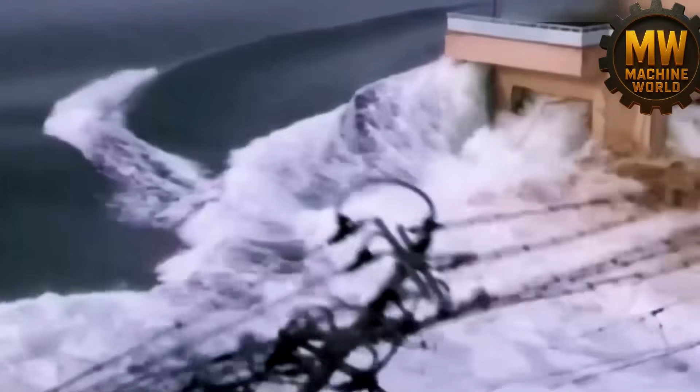It would seem an impossible task to fortify an entire coastline against the Pacific, but without this $12 billion investment, the next seismic event would find the population utterly defenseless against the absolute fury of the sea. One can notice how a concrete scar now stretches across 400 kilometers of the coast. This is not merely a wall, but a monumental engineering feat designed to prevent a repeat of past tragedies. It gets more complex further on.

The country does not simply float on the water, but sits directly atop a geological time bomb. To understand the scale of this struggle against the ocean, one must look down into the dark depths where sunlight never penetrates. Japan is positioned exactly at the convergence point where four gigantic tectonic plates collide. Imagine four stone continents continuously pushing, scraping, and fighting for space with relentless pressure. This is the Ring of Fire, a zone that produces more than 500 earthquakes every single year. The Earth there never sleeps.

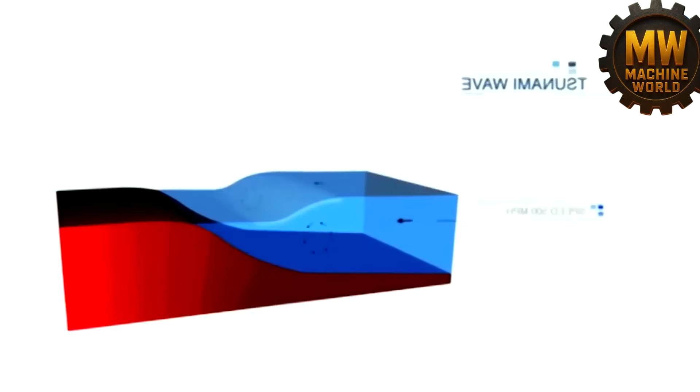When the accumulated subterranean tension finally ruptures, the seafloor is thrust upward with unimaginable physical violence. This displacement does not create a standard wave, but a moving mountain of water with immense kinetic energy. During the events of 2011, the old defenses of Japan, consisting of walls 7 or 8 meters high, were treated like children's toys by the surge. The water transitioned over them as if they did not exist, exerting pressure that crushed old concrete and twisted structural steel. It is visible how the sheer force of the tide rendered previous engineering philosophies obsolete.

At first glance, the destruction was absolute, but in reality, it forced a fundamental shift in defensive strategy. Engineers realized a terrifying truth. It was not enough to simply build higher. They needed to reinvent the physical structure of the coastline itself. The primary mission evolved from merely stopping the water to a strategy of buying time. This precious window of minutes provides the opportunity for people to reach higher ground and survive the initial impact. Consequently, the construction of this 21st century Great Wall began under a new set of parameters. The process is only gaining momentum.

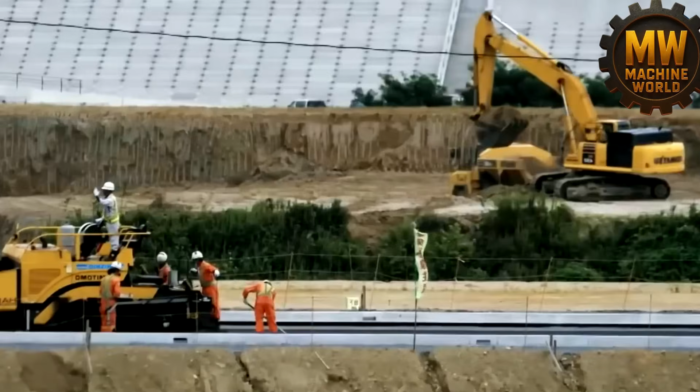One can notice the precision with which the new barriers are integrated into the topography. The camera glides along the massive embankments where reinforced materials are layered to withstand seismic vibrations. Everything only gets more complicated as the design must account for the specific fluid dynamics of a tsunami. The engineering focus shifted toward structural resilience and the dissipation of energy. Every meter of the 400-kilometer barrier represents a calculated defense against the movement of the tectonic plates. This massive shield stands as the current culmination of Japan's efforts to stabilize its future against the unpredictable shifts of the Earth's crust. Thus, the transformation of the coastline reaches a state of readiness for the challenges that lie ahead.

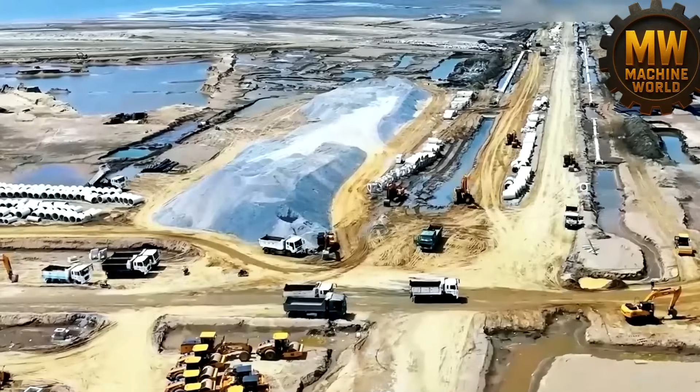One laboratory. This is where the survival of an entire coastline begins before a single grain of sand is even moved on the beach. Why must scientists recreate the apocalypse in giant water tanks before pouring the first drop of cement? It would seem that simple observation of historical events would suffice for design. However, by repeatedly hurling tons of water against scaled wall models, researchers discovered that sheer height was not the ultimate defense. At first glance, a tall barrier appears impenetrable, but in reality, the immense force of a tsunami would snap a purely vertical structure at its base like a dry branch. One can notice how the water pressure concentrates at the foundation, seeking the weakest point of resistance.

The solution lay in the geometric shape of the structure and, more importantly, in what remained hidden beneath the surface of the Earth. The regional coastline of Tohoku in Japan presents a geological nightmare consisting primarily of soft, unstable, and treacherous sand. Building a concrete rampart 15 meters high on top of such a substrate is equivalent to balancing a heavy truck on a wet sponge. The process is only gaining momentum as engineers address this fundamental instability. If a tsunami were to strike a wall built on untreated sand, the ground would liquefy and the entire structure would collapse forward. The engineering response was both brutal and invisible to the naked eye.

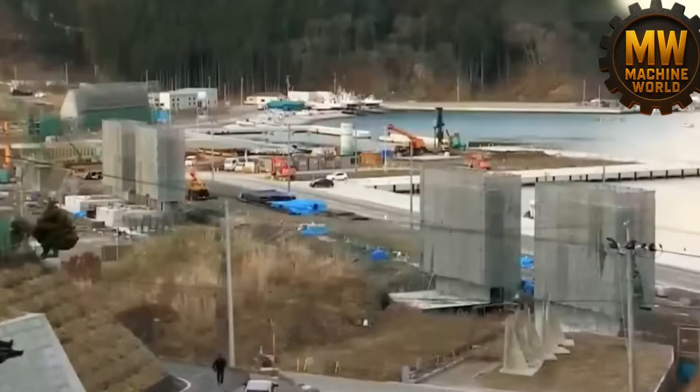The true strength of this defensive line is not found in the visible concrete, but in the massive reinforcements buried deep within the coastal shelf. Drilling machines resembling equipment from a science fiction narrative began the transformation of the landscape. They did not merely excavate soil, they fundamentally altered its physical properties through mechanical and chemical intervention.

Steel and concrete piles were driven 25 meters into the earth, a distance equal to the height of an 8-story building. Everything only gets more complicated as the stabilization continues. One can notice how the equipment injects liquid cement directly into the sand layers, fusing the loose particles into a solid mass of artificial rock. This creates an unbreakable root system designed to anchor the barrier against the most violent hydraulic forces.

It gets more complex further on. The objective was to ensure that even if a wave overtopped the crest, the foundation would not tilt or give way. The wall would remain standing like a stone sentinel, refusing to cede ground to the ocean.

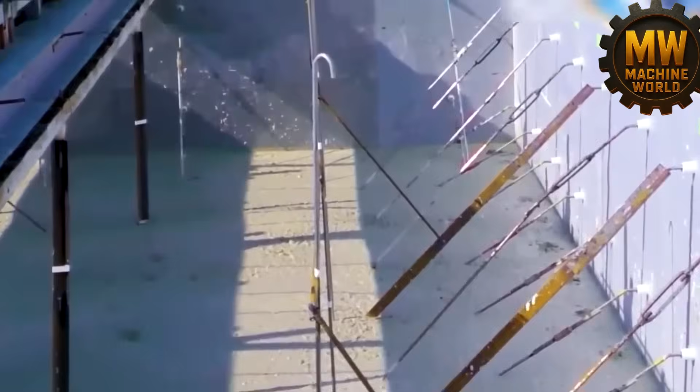With the foundation finally prepared for this industrial war, the construction army arrived on the scene. 30,000 people, including engineers, laborers, and crane operators, formed a massive workforce dedicated to the project. It only looks obvious to call this a team, but in reality, it was a specialized military-scale operation. A fleet of heavy machinery consumed diesel and operated 24 hours a day for 7 consecutive years.

The logistical challenge was nearly impossible to comprehend. It involved the construction of a continuous, flawless barrier spanning 400 kilometers. This distance is equal to the journey between London and Paris, but realized entirely in military-grade reinforced concrete. Transition to the next level.

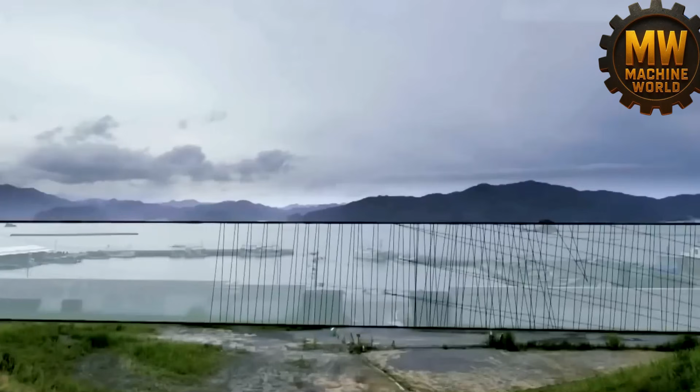One can notice the hypnotic and terrifying scale of the work as the metal skeleton takes shape. First, thousands of tons of steel rebar with metal bars as thick as a human arm were woven into complex industrial cages. This serves as the internal skeleton of the structure, providing the necessary tensile strength. Without this dense webbing, the rigid concrete would shatter instantly under the tension of a massive wave.

Then came the liquid heart of the rampart, the industrial concrete. High-pressure pumps operated with a steady rhythm, pushing a gray avalanche of material into the waiting molds. Section by section, the massive blocks began to rise from the reinforced ground. The material leaves the molds, transitioning into a calm stage as the concrete cures into its final form. Thousands of tons of reinforced concrete and high-grade steel form the primary line of defense, rising block by block against the horizon.

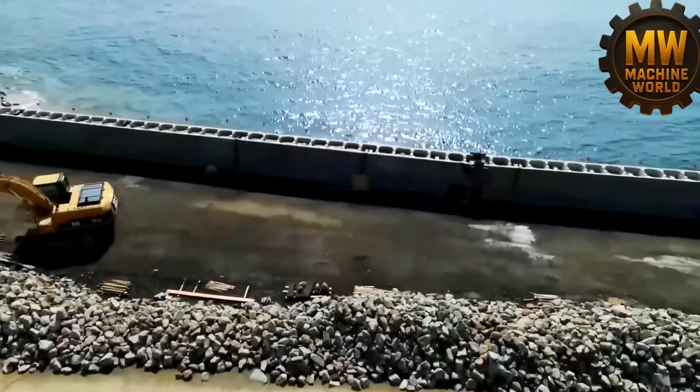Why is a vertical wall insufficient to stop the ocean? A flat surface would eventually fail because water strikes it with the kinetic energy of a high-speed bullet train. To dissipate this immense impact, engineers deploy a geometric secret weapon known as tetrapods. One can notice these 4-legged structures resembling giant concrete toys scattered along the shoreline. But in reality, each individual unit weighs several tons, and they are stacked by the thousands directly in front of the seawall. Their primary function is the creation of controlled chaos.

When a massive wave makes contact, the water does not strike the solid wall like a single crushing hammer. Instead, the liquid is forced to break apart, swirling and foaming as it loses momentum between the thick concrete legs of the tetrapods. They successfully transform a lethal strike into a manageable push through pure physical resistance. The process is only gaining momentum. It is the application of physics to tame the raw force of nature, yet a significant logistical challenge remained for the designers.

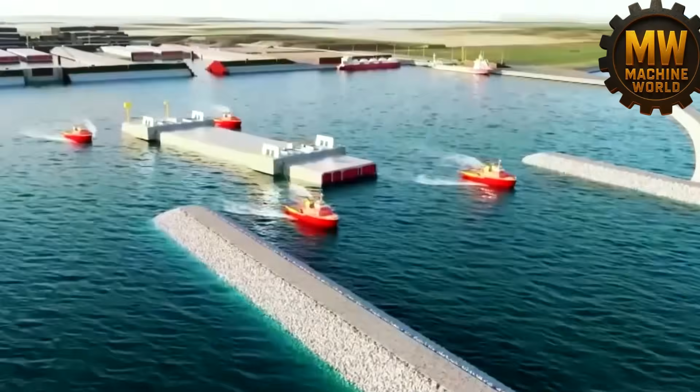Japan depends entirely on the sea for its survival. Fishing vessels, massive cargo ships, and tourism boats require constant passage into and out of the harbors. If the entire coastline were sealed behind a continuous wall, the national economy would effectively vanish. In such a scenario, coastal cities would suffer from economic starvation. How do you allow ships to pass while simultaneously stopping a tsunami?

The Japanese engineering solution was the development of massive steel guillotines. In high-traffic ports, they installed gates that look like something from a cyberpunk future. One can observe how the equipment gradually integrates into the landscape. Yet these structures are terrifying in their efficiency. There are 2 primary categories of these gates. The first is the vertical drop gate.

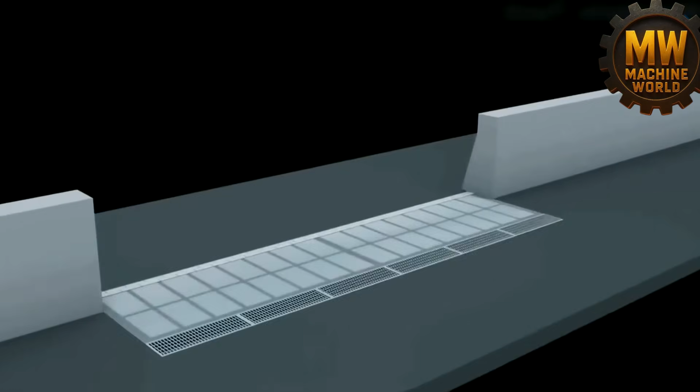A massive steel plate weighing several hundred tons remains suspended between 2 towering concrete supports. It stays in its elevated position as ships navigate safely beneath it every day. But this is not the limit of the system. The moment seismic sensors detect an earthquake on the ocean floor, the mechanism changes. Hydraulic motors release the heavy locks, and the massive plate descends rapidly. The port is sealed within seconds as a wall of steel blocks the entrance.

The second type of barrier is even more technically impressive, consisting of gates that rise directly from the seabed. These structures lay flat on the ocean floor, remaining invisible and allowing ships to navigate over them without obstruction. When the alarm sounds, air pressure or hydraulic systems force the gates upward. An instant barrier emerges from the depths.

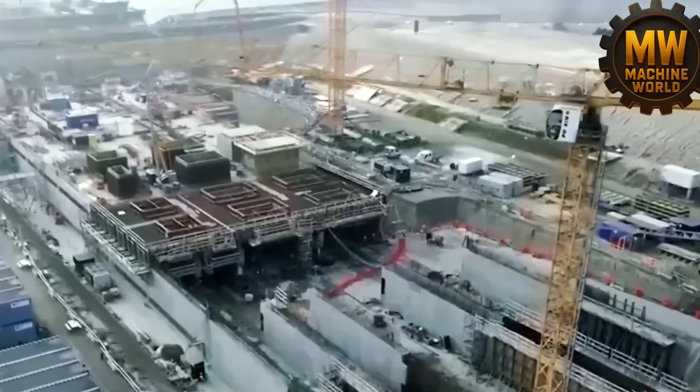A significant challenge here is the constant threat of corrosion. Salt water destroys metal surfaces rapidly through oxidation. These gates must be capable of functioning perfectly even after sitting idle in salt water and abrasive sand for 30 years.

A single failure or a rusted hinge could lead to the flooding of an entire city. Therefore, the maintenance of these mechanical beasts is treated as a matter of absolute national security. Japan did not stop its engineering efforts at the surface level.

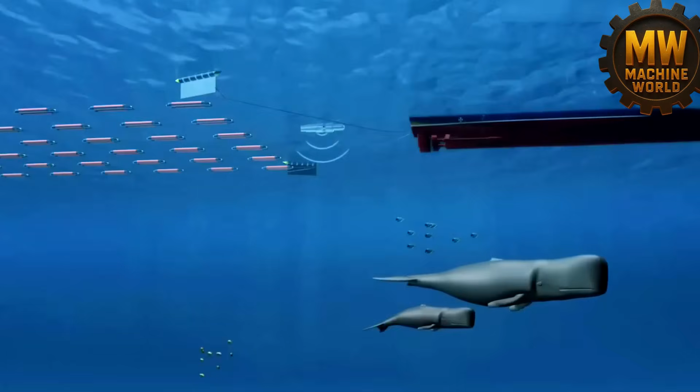200 meters is the length of each individual concrete segment used by Japanese engineers to construct underwater passages through a method that initially seems to defy physical logic. Why would a construction team build a massive tunnel on dry land only to intentionally sink it into the depths of the ocean? It only looks obvious to build directly on the seabed, but in reality, constructing these elements in controlled dry docks ensures the structural integrity required to withstand immense hydrostatic pressure. This specific technique is known as the immersed tube method, and it relies on the fabrication of monolithic components before they ever touch the water.

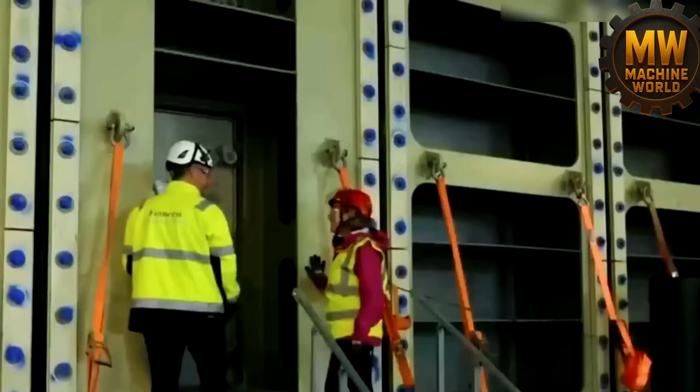The scale of these structures is immense. 73,000 tons is the weight of a single segment, a figure that surpasses the mass of a fully loaded aircraft carrier. Engineers must oversee the casting of dozens of these concrete giants within the confines of specialized dry docks. But this is just the beginning.

One can notice the slow movement of valves as the docks are eventually flooded, allowing the displacement of water to lift the structures. Powerful tugboats strain against the tide as they drag the floating concrete monsters into the open sea. It is visible how the vessels fight against unpredictable currents and wind shifts to maintain a precise trajectory. The equipment gradually maneuvers these segments toward their final coordinates in what functions as a slow and high-stakes industrial ballet. The process is only gaining momentum.

Precision becomes the absolute priority once the sinking operation commences. At first glance, submerging a 73,000-ton block seems like a matter of brute force. But in reality, the segment must be guided into the total darkness of the seabed to align with the previous section. A deviation of only a few millimeters would compromise the entire structure. Everything only gets more complicated as the segment nears the ocean floor. If the connection is not perfectly flush, the seals will fail under the weight of the water, leading to a catastrophic breach. The pressure at these depths would easily crush the concrete blocks if the alignment were even slightly off.

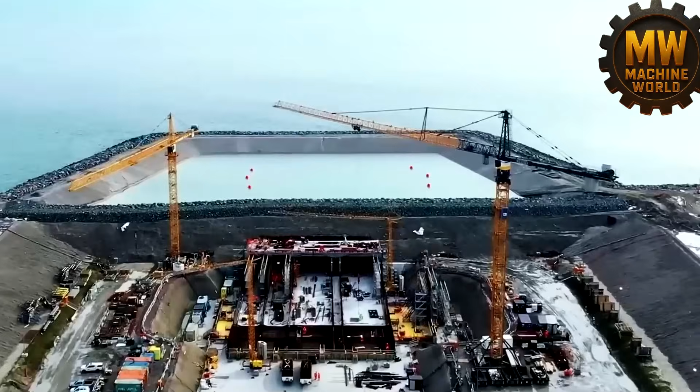Thus, the massive segment eventually settles into its designated cradle, completing its transition from a dry dock to a functional underwater artery. Ballast tanks are gradually flooded with water to force the massive tunnel sections to descend slowly toward the seabed. Why is the immersion speed controlled with such agonizing precision? At first glance, the sinking looks like a simple mechanical drop. But without a gradual increase in weight through water intake, the buoyancy of the hollow concrete structure would cause it to tilt or fracture during the transition through the currents.

Sonars and high-frequency lasers guide the descent through the murky depths. One can notice how the equipment gradually adjusts the orientation of the segment as it nears the foundation. The process is only gaining momentum.

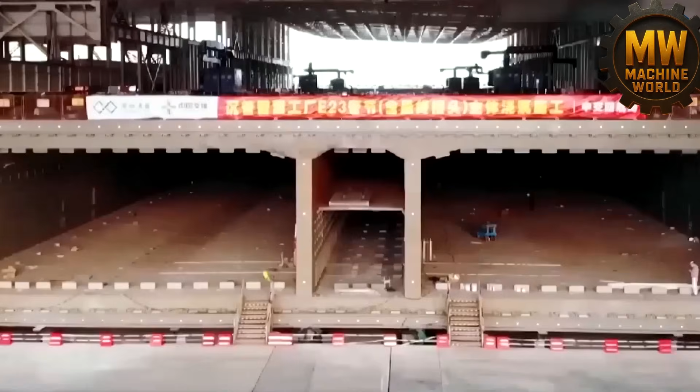A giant rubber gasket seals the interface at the exact moment the two massive pieces make physical contact on the floor of the ocean. It is visible how the immense pressure of the surrounding water pushes the segments against one another with a force of thousands of tons. This physical phenomenon makes the seal increasingly tighter as the depth increases. The force of the sea itself is utilized to ensure the interior remains perfectly dry. It gets more complex further on.

Engineers cover the entire structure with layers of heavy stone and protective sand to bury the tunnel permanently beneath the seabed. This armor shields the concrete from anchors and shifting currents. Motorists will eventually travel through this corridor at speeds of 100 kilometers per hour. They will move forward without knowing that millions of tons of ocean water are pressing down just a few meters above their heads. The structure literally gains life after the concrete dries and the heavy machinery departs from the site.

These walls and submerged tunnels are far from being dead stone. They possess a complex nervous system. One can notice how hundreds of electronic sensors are embedded deep within the concrete layers during the initial casting. Everything only gets more complicated.

Sensors monitor the external water pressure, the vibrations generated by heavy trucks, the air temperature, and even the smallest displacement of the surrounding soil. This data flows in real time toward control rooms that resemble command centers used by space agencies. The equipment ceaselessly records every fluctuation in the environment.

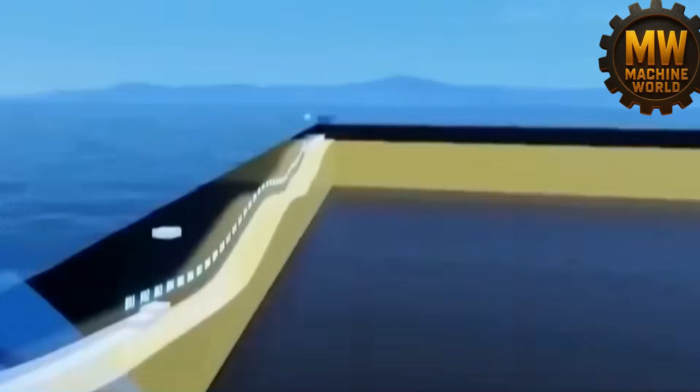If a microscopic crack appears in the reinforcement, the engineers receive an immediate notification. If the seabed shifts by as little as 1 millimeter, the alarm sounds throughout the monitoring station. High stakes demand this level of constant vigilance. The molten stream of data ensures the safety of the entire underwater passage. This ensures the integrity of the work as the construction phase reaches its conclusion.

$12 billion is the staggering financial weight invested in a project where the margin for error is non-existent. Why invest such a colossal sum into a barrier that cannot fully halt a massive tsunami? It seems counterintuitive to build a wall that the ocean might still crest over. But the strategic objective lies not in total dryness, but in the physics of energy dissipation, as the structure is engineered to fracture the lethal momentum of an incoming surge.

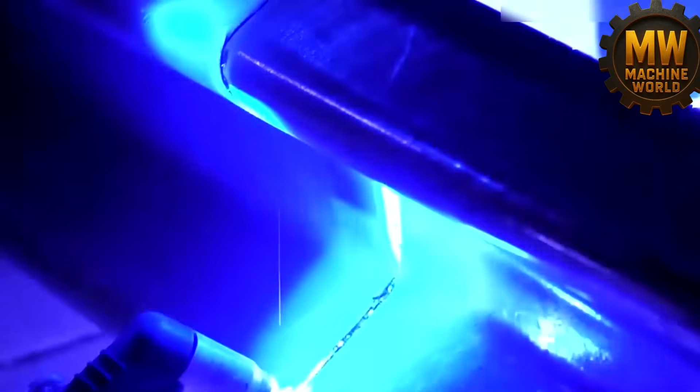The process of maintaining this defense is a continuous confrontation with the natural elements. Automated underwater robots equipped with high-resolution sensors glide along the submerged foundations to detect structural fatigue. Maintenance teams work systematically to clear drainage channels, ensuring the hydraulic integrity of the system remains absolute for the moment of impact. One can notice how the metallic arms of the ROVs maneuver through the dark currents to inspect every inch of the base. But this is just the beginning.

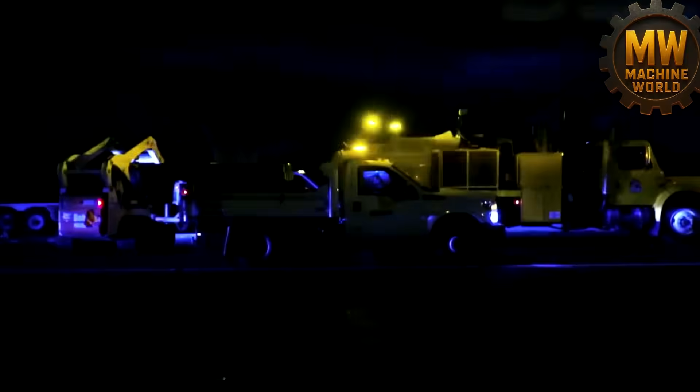Simulations conducted by engineers reveal a critical technical reality regarding the wall's performance. The barrier reduces the physical impact of a wave by 30 to 50%. Instead of a supersonic wall of water obliterating everything in its path instantly, the resulting flood becomes a slower, more predictable inundation. This serves a singular, vital purpose: the acquisition of time.

5 minutes or 10 minutes represent the narrow window required for a successful evacuation. It is the duration needed for the elderly to reach higher ground or for school staff to move children to safety zones. This concrete scar, stretching across 400 kilometers of the Pacific coastline, does not represent human arrogance against the sea. The movement of tectonic plates and the inevitable rise of the ocean are recognized as unstoppable physical constants.

At first glance, it is merely a gray line of stone, but in reality, it is a technical shield designed for human persistence. It functions as a testament in steel and stone, stating that while the coast may be struck, it will not be defenseless. The wall is not a promise of immortality, but a calculated bet on the survival of the population.

Everything only gets more complicated when the sirens eventually sound. This cold mass of reinforced concrete will stand as the solitary physical buffer between the kinetic energy of the ocean and the inhabitants of the shore. This is the point where complex civil engineering intersects with the primal instinct of survival.

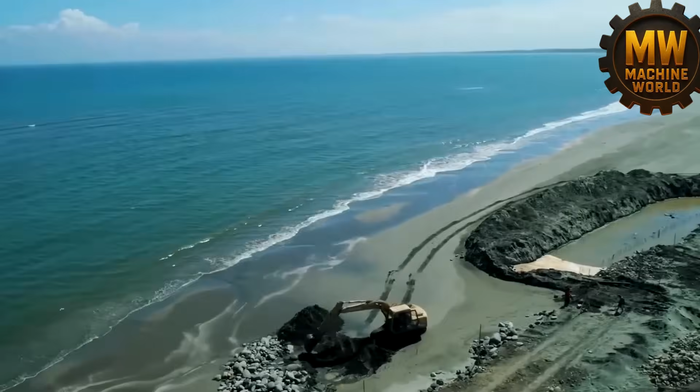19,000 tons of earth and rock must be processed to extract a mere 260 grams of gold. This is roughly equivalent to the weight of a single standard smartphone. How is such a minute quantity of precious metal separated from an almost incomprehensible volume of ore? The process is only gaining momentum. It is a technical narrative of a luster that originates in the subterranean dark, marking a journey from ancient geological formations to the finality of a gold bar.

Thousands of tons of rock split apart under the force of industrial crushers to reveal the microscopic particles within. One can notice the dust settling in heavy clouds as the primary grinding stations begin their work. The story of this metal is one of extreme ratios and mechanical precision. From here, the transformation moves to the next phase of processing.

4,000 tons of gold are extracted annually across the entire globe, marking the sheer scale of the industry behind this precious metal. Why is this specific element pursued with such intensity compared to other materials found in the crust? One might assume its value is merely a social construct, but the answer lies in its physical invulnerability, as gold does not rust, fade, or corrode under any natural conditions. It remains one of the few substances on Earth that never requires a secondary proof of its worth, standing as a permanent anchor of confidence.

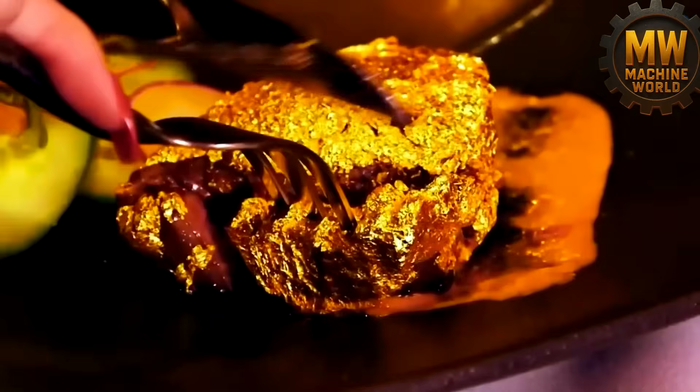The process is only gaining momentum as modern exploration techniques replace the primitive pans of the past. Tens of thousands of seekers pushed westward, driven by the prospect of power they could physically hold in their hands. The metal manifests throughout the modern luxury sector, appearing on high-performance supercars and even as edible flakes atop steaks that cost several thousand dollars per serving.

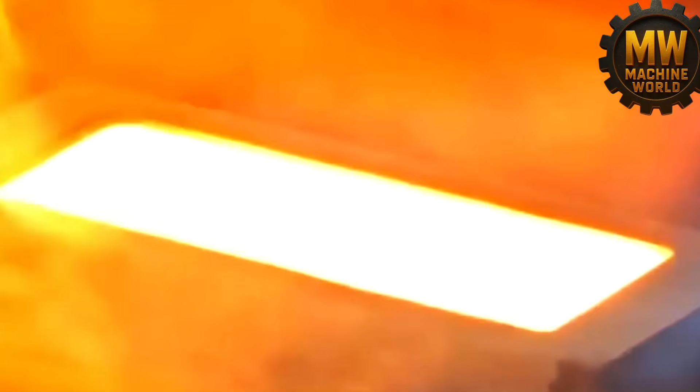One can notice how the material transitions from a raw geological find into a manufactured marker of status. It seems simple to categorize gold as mere jewelry, but in reality, it has served as sacred objects and elite household utensils since the Neolithic era, dating back more than 6,000 years.

Rumors once circulated regarding a brilliant gold card associated with the name of Donald Trump, with some claims suggesting a value of $5 million. It was even whispered that possession of such an object could influence the granting of American citizenship. Whether these items are functional tools or purely symbolic, they represent ambition that a person can wear.

It does not end at this stage, as the gold must first be liberated from impenetrable subterranean vaults. Equipment gradually penetrates the deeper layers of the earth, where the metal remains hidden from the surface. It is visible how the search for deposits requires extreme patience, as the ore does not reveal itself without significant mechanical effort. The camera glides along the transition from historical surface mining to the complex industrial operations of the present day. Everything only gets more complicated as the hunt for the metal leads into two entirely different environmental worlds.

Boulders split with a crack during the extraction phase, moving the material from the darkness of the depths toward the processing facilities. Before the gold can be locked away in high-security vaults or displayed in high-end showrooms, it must be isolated from the surrounding rock. Transition to the next level involves shifting the focus to the specific geographical zones where mining reaches its peak. From here, the journey moves toward the technical challenges of the terrain.

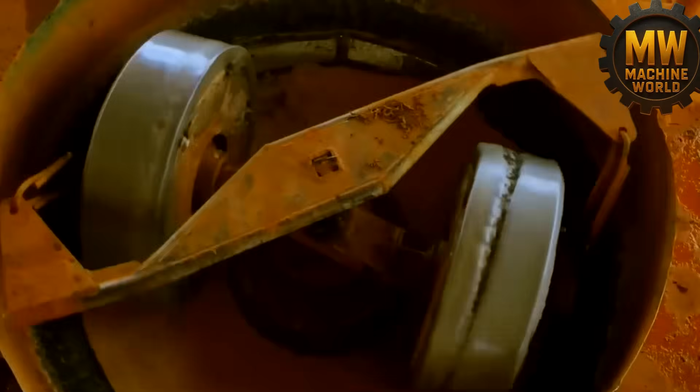$1 a day is the entire budget for survival in a region frequently described as living atop vast gold reserves. Why do families choose a life of such extreme hardship under a scorching sun? The answer lies in the red dust that coats everything, where gold does not glitter in shop windows, but remains hidden beneath a landscape of interrupted childhoods. Families, including children far too young to spell their own names, grasp rusted shovels and follow their parents into dry, relentless soil with the singular hope of unearthing a few precious flakes. This gold mining is not a profession, but a desperate lifeline.

It gets more complex further on. One can notice how the health of these children is the true currency spent as they grow up inhaling mineral dust instead of pursuing dreams. Their classrooms are the muddy banks of rivers, and their toys are industrial tools. For them, the metal is never a symbol of status or wealth. It is the only physical chance to survive for another 24 hours.

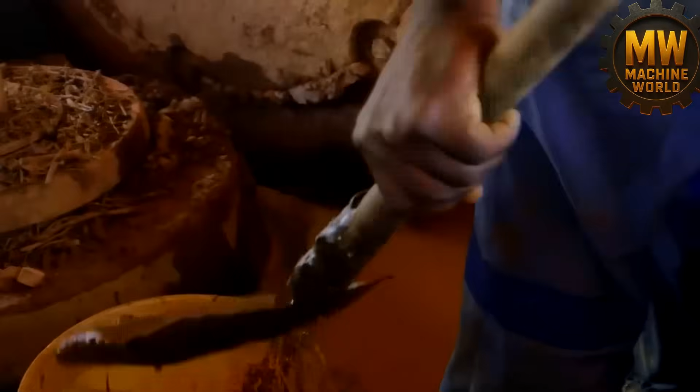One portable metal detector and a pair of trained ears are the only tools used to begin a standard day of hunting. It seems simple at first glance, but in reality, the process relies on acute sensory focus and geological knowledge. Miners walk with slow, deliberate steps, their eyes fixed on the parched earth while listening for the faint electronic pulses of the device. Every beep provides a brief window of hope, but the labor is never left to chance. Experienced miners identify specific geological indicators, searching for gold deposits around quartz, slate, or ancient alluvial paths where the metal once traveled. The process is only gaining momentum.

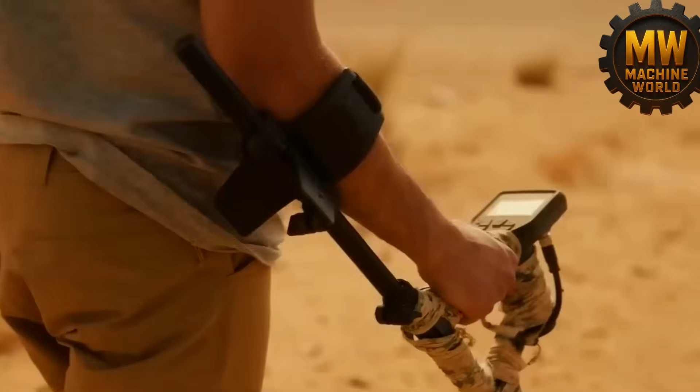Once a signal is confirmed, the team initiates the excavation and the physical toll begins. Tens of meters are excavated into the earth using nothing more than shovels, pickaxes, and raw human strength. The camera glides along the vertical drops where shafts grow deeper without the assistance of any modern machinery. In certain sectors, miners utilize rough tree trunks to provide structural support for the tunnels. Yet the mechanical risk of a total collapse remains a constant physical reality. As the depth increases, the workers must crawl through narrow horizontal passages that are barely wide enough to accommodate a person lying on their side.

Every hole serves as a high-stakes gamble. A tunnel might result in an empty vein, or it may reveal ore bearing enough value to equal a full month of wages. Everything only gets more complicated as the raw material reaches the surface. Heavy sacks filled with earth are secured with manual ropes and hoisted upward by basic pulley systems. These bags are piled in staging areas to await mechanical crushing. Once the rock is pulverized, the material is moved to a separate zone for a delicate and hazardous chemical intervention. Transition to the next level. This stage involves the introduction of mercury into the sediment.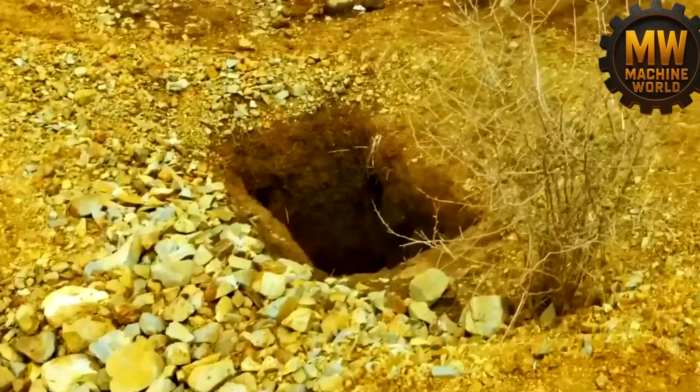Although mercury is a documented neurotoxin, it remains the only accessible chemical in this environment capable of dissolving gold to separate it from surrounding impurities. The equipment gradually processes the mixture, allowing the mercury to bind with the microscopic gold particles. The heavy metal mixture sits in shallow pans as the separation begins. This phase concludes the extraction, leaving the concentrated amalgam ready for the final heat treatment.

20 to 30 minutes is the exact duration workers spend kneading the mixture with mercury to initiate a chemical bond. Why is such a manual process still utilized in these regions? Manual pressure forces the two elements to fuse into a gray, putty-like amalgam. But this is just the beginning. The mercury remains trapped within the metallic mass until intense heat is applied to the substance.

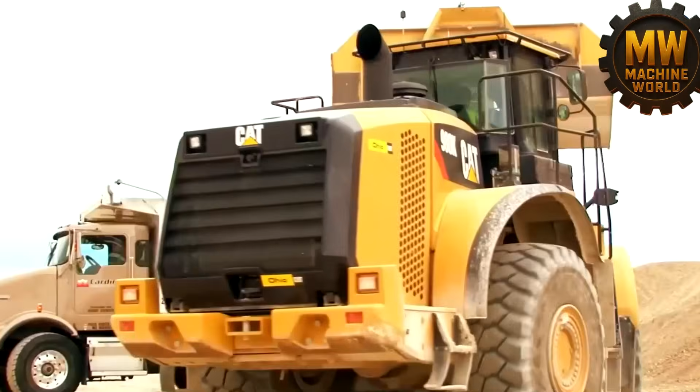One can notice how the flame causes the mercury to evaporate, vanishing into the atmosphere and leaving behind only a residue of raw gold. It only looks obvious that this is the most direct path to the metal, but in reality, the simplicity of this primitive method remains devastating to the environment. This lethal and archaic approach stands as the total opposite of how gold is extracted on the other side of the planet.

In total contrast to the manual mining operations found in Africa, industrial sites in the United States have adopted modern machinery and advanced technology to extract gold on a massive scale. Such an approach not only increases overall efficiency, but also actively helps to reduce the environmental footprint of the operation. The process is only gaining momentum as it shifts to the gold mines of Nevada. Here, the journey toward the precious metal takes a fundamentally different path driven by technical innovation.

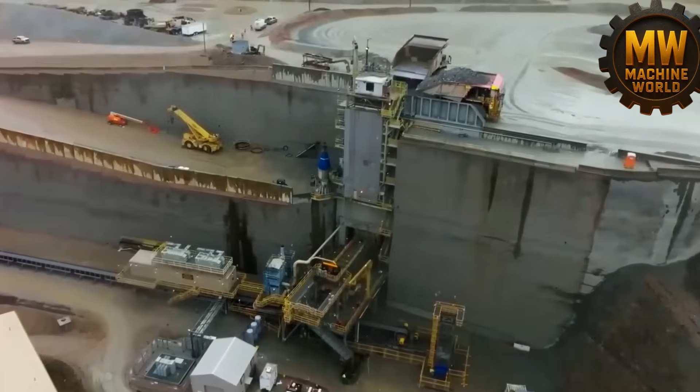10 to 20 meters is the standard depth for the deep boreholes drilled into the earth during the first step of modern gold mining. An imposing drilling rig, mounted securely on a heavy-duty service truck and covered in a complex network of hydraulic lines, drives steel pipes into the solid rock with incredible precision and mechanical force. The equipment gradually penetrates the crust to prepare for the introduction of blasting agents.

Why do engineers drill dozens of holes with such inch-perfect precision? At first glance, the placement might seem random, but it ensures the energy is distributed evenly. These voids are subsequently filled with explosives, which are carefully prepared to shatter thick layers of solid rock. Technicians place individual detonators into every single hole. One can notice how a single site may contain anywhere from 50 to 100 of these charges. Each one is meticulously connected and timed with millisecond precision to ensure a controlled sequence.

Everything only gets more complicated as the final countdown begins. When the designated moment arrives, the explosives are triggered simultaneously. Powerful detonations shake the entire area with a low-frequency roar. It is visible how the rock face fractures instantly, sending dense clouds of dust and debris into the air as the solid ground is transformed into manageable ore. This concludes the primary fragmentation phase, opening the road to the next stage of material transport.

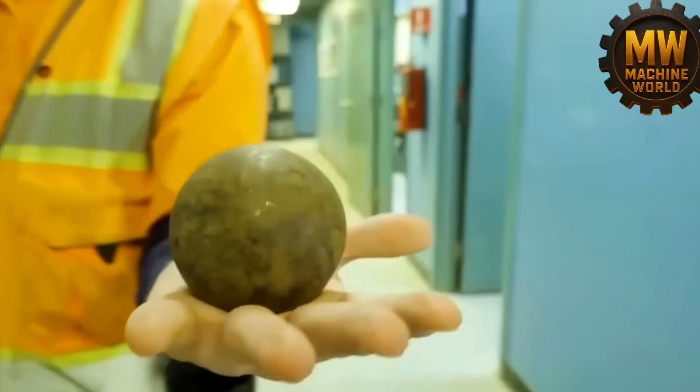Tens of thousands of tons of rock are shattered in a single moment as explosions release thick plumes of smoke into the atmosphere. The released energy is so extreme that it tears away entire sections of the mountain, disintegrating massive stone formations into thousands of smaller fragments. This catastrophic force is precisely calculated to simplify the subsequent collection and separation of the precious metal. Why is such a violent disruption of the landscape necessary? It only looks obvious that machines could dig the earth, but in reality, the rock is too dense for even the strongest equipment. Without these controlled detonations, the gold-bearing ore would remain locked within the impenetrable mountain walls.

Heavy-duty excavators move into the blast zone as the dust slowly settles. With each mechanical cycle, the buckets scoop up several tons of ore and deposit them onto a sophisticated system of conveyor belts that stretch along the perimeter of the mining site. The equipment gradually moves the material toward temporary storage with mechanical consistency. But this is just the beginning.

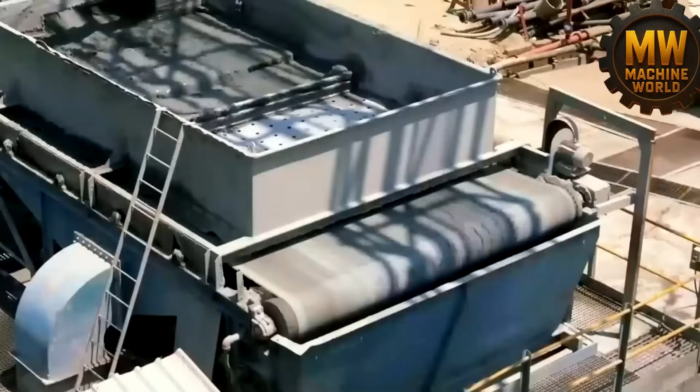A massive ball mill receives the ore for the primary grinding stage. The giant machine is filled with tens of thousands of steel spheres, with individual weights ranging from a few kilograms to over 27 kilograms each.

In total, several hundred tons of solid steel fill the rotating drum. One can notice the slow, rhythmic rotation of the mill as the internal load shifts. The steel spheres fall and collide with the ore with tremendous force as the mill turns on its axis.

Little by little, the hard rocks are pulverized under the weight of the steel until they are transformed into a fine, uniform powder. This grinding cycle continues without interruption for 20 to 30 minutes, reducing the ore until it reaches the consistency of dust. Everything only gets more complicated as the extraction of the gold reaches its next critical chemical phase.

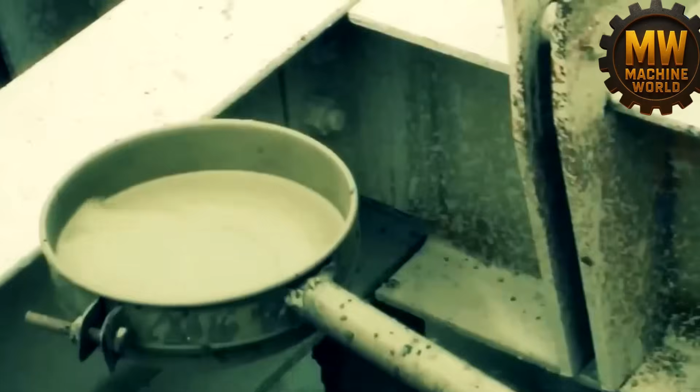1120 degrees Celsius is the precise temperature required to bring the extraction process to its thermal conclusion. Why is the transition to a liquid state so critical at this final stage? The primary crushing of the raw material into a fine powder has already made the gold much easier and more efficient to handle during the initial phases. But the heat serves a different purpose, ensuring the metal reaches a state of total homogeneity before it is cast into its final form.

Water is added to the crushed ore, transforming the dry mineral into a thick slurry that flows like heavy sludge. It is visible how this consistency allows the equipment to separate the gold from undesirable waste materials with greater fluidity. The extraction begins with a method that only looks obvious: physical separation in large open-air tanks. But this is just the beginning.

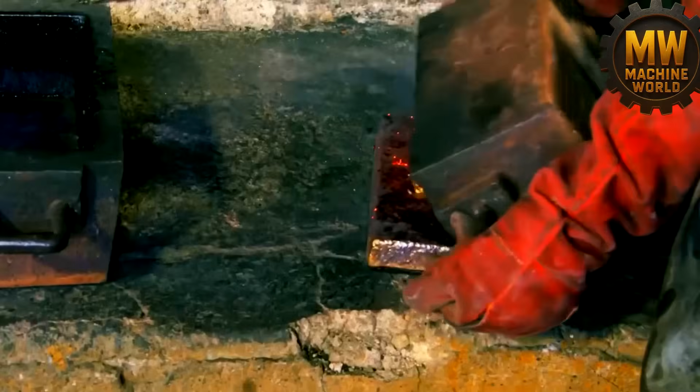Chemical agents, such as cyanide, are introduced into the mixture to dissolve any remaining gold particles still trapped within the ore. This solution is then pumped into an electrolytic cell, where a constant flow of direct current passes through the gold-bearing liquid. One can notice how the gold ions migrate steadily toward the negative electrode, gradually depositing themselves as a solid layer of pure metal that adheres firmly to the surface.

Everything only gets more complicated as technicians monitor the environment. Every parameter is maintained under carefully controlled conditions to guarantee the resulting metal reaches a purity level of nearly 100%. The process is only gaining momentum. Once the electrolysis is complete and the pure gold has been isolated, the metal enters a high-temperature furnace.

It seems simple to melt the metal, but in reality, this stage is designed to eliminate every last trace of remaining impurities. The camera glides along the surface of the melt as the gold turns into a glowing liquid at 1120 degrees. This liquid state allows the material to be poured into molds with absolute precision. High-temperature melting also makes the gold softer and more uniform, creating the ideal physical properties for shaping it into heavy bars.

The casting process does more than just give the gold its standard industrial shape. It actively preserves the inherent purity of the metal as it transitions from a liquid stream into a solid ingot. The molten metal settles in an even layer within the mold, and the heat gradually dissipates as the bars begin to solidify. From here, the transformation moves to the next phase of processing without haste.

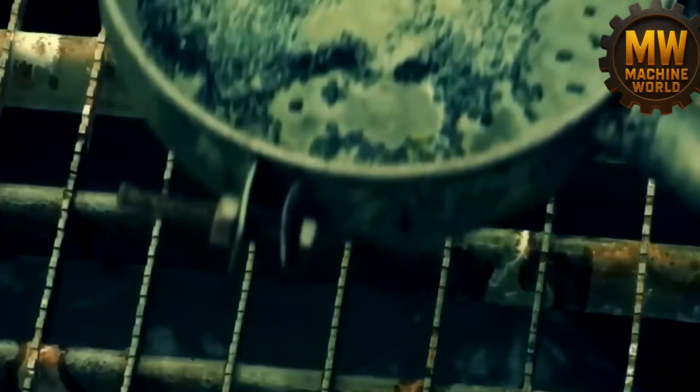One can notice how the shimmering fluid surface dulls and stabilizes as the temperature drops. The equipment gradually settles as the metal hardens into a dense, clean, and perfectly rectangular geometry. At first glance, the bars appear finished once they solidify, but in reality, they must undergo rigorous metrological verification. Each unit is placed upon high-precision electronic scales to establish its exact mass with laboratory-grade accuracy.

On average, these individual gold bars weigh between 1 and 2 kilograms. The chemical composition is remarkably consistent, containing 99.99% pure gold. This leaves less than 0.01% of residual metallic impurities within the final structure. The process is only gaining momentum.

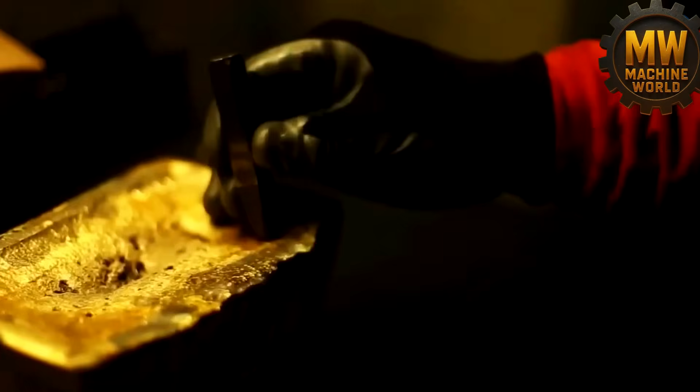Technicians then subject the gold to a specialized cleaning phase using a mild acidic solution. It is visible how the liquid reacts with the surface to eliminate any trace of heavy metals or chemical compounds lingering from the smelting stage. Because gold is chemically inert to this specific reagent, the acid dissolves only the foreign contaminants without affecting the precious metal itself.

Security protocols take over once the inspection is complete. Armored transport systems move the pure gold bars to the primary banking institutions of the United States, including the high-security facilities of the Federal Reserve. Here, the ingots are deposited into reinforced vaults under the constant surveillance of professional security personnel.

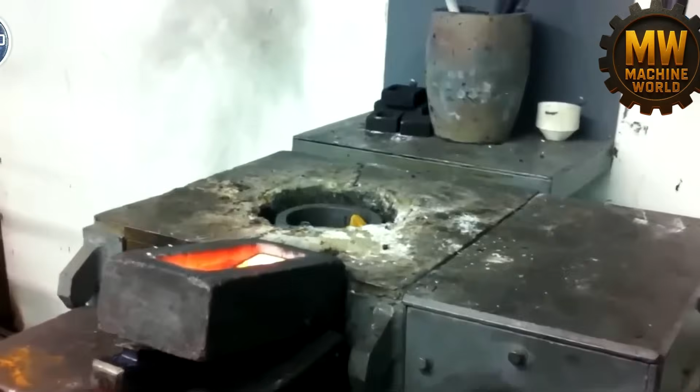Every movement is logged, and every bar is carefully preserved to maintain total confidentiality and maximum physical protection. Everything only gets more complicated when considering the physical properties of the finished product. The metal has traveled a long path from the initial blast in the mine to the final fusion in the furnace, yet its industrial utility remains vast. One can observe the extreme ductility of the material, which allows a single ounce of gold to be drawn into a wire finer than a strand of silk.

But this is not the limit of its historical impact. During the gold rushes of the 19th century, entire populations abandoned productive farms and established cities in a desperate attempt to find wealth in the earth. It is a documented fact that many of these individuals found it impossible to abandon the search even when faced with total failure. The pure gold bar remains in the vault, ready for the next phase of its global circulation.

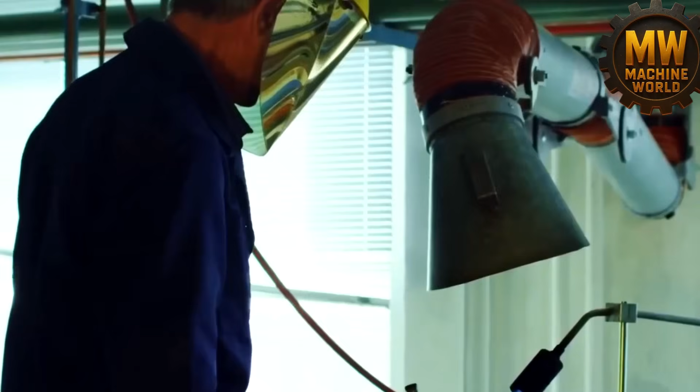19,000 tons of rock must be excavated and processed to obtain a mere 260 grams of gold. This staggering ratio highlights the exhaustion of easily accessible deposits on the planet, a reality that forces miners to descend to unprecedented depths into the crust. Why must such immense volumes of earth be displaced for a handful of metal? While it seems like an inefficient expenditure of energy, the scarcity of the element dictates that even trace amounts justify the industrial effort. Only after surviving the trials of intense heat and complex chemical reactions do these 260 grams reach the workstations of specialized jewelry manufacturers.

The journey continues toward the fabrication floor. From refined bars of pure gold, the material is transported under high security to facilities where the transformation into fine jewelry begins. One can notice how technicians place the bars into high-temperature furnaces to initiate the softening process. The equipment gradually raises the internal heat until the metal achieves a specific state of flexibility and malleability. But this is just the beginning.

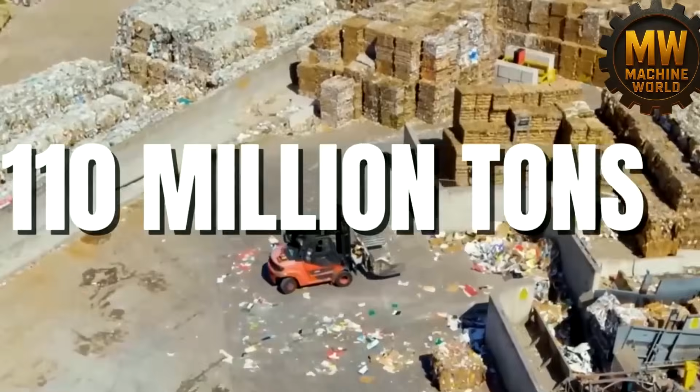It only looks obvious that gold is soft, but in reality, achieving the exact structural consistency required for intricate work demands precise thermal control. Once the desired state of flexibility is reached, the gold is fed into powerful rolling mills. These machines exert intense, calculated pressure to flatten and stretch the metal into long, thin strips or incredibly delicate wires. The camera glides along the rollers as the thickness of the gold decreases with every pass, transforming the heavy bars into fine filaments. Everything only gets more complicated as the material moves to the next stage.

Specialized chain-making machines receive the fine gold wires for the final structural shaping. The equipment rotates ceaselessly, winding the wire and forming it into small, precise links with millisecond timing. Each individual link is carefully assembled and joined to create a continuous, unbroken gold chain. One can notice how the automated manipulators align the gold with sub-millimeter accuracy.

Every single gram of this glittering material preserves a detailed history of the power of technology and the exact price of human labor. These are two distinct sides of the same precious metal, representing both engineering mastery and physical endurance. The process is only gaining momentum as the focus shifts to another ubiquitous material.

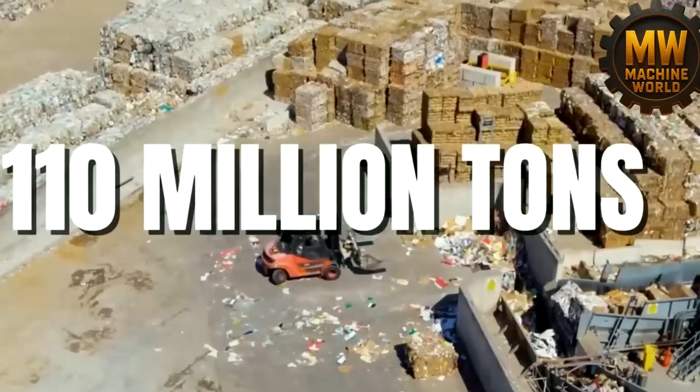That cardboard box that arrived at your door today, which was opened and discarded without a second thought, does not represent the end of a narrative. In reality, it marks the commencement of an epic industrial journey involving global logistics and massive recycling infrastructure. Every year, the global industry processes more than 110 million tons of paper and cardboard to sustain the demands of modern commerce. At first glance, a box is mere waste, but it serves as the raw material for a colossal recovery cycle. The fibers are separated and cleaned as the material enters the pulping phase. This transition to the next level of the industrial chain ensures that the cycle of production and consumption continues without interruption. Thus, the material leaves the consumer's hands and moves back into the depths of the processing plant.

100 billion cardboard boxes are discarded every single year within the borders of the United States alone. Why is such a staggering volume of material not considered a terminal waste product? It would seem that these discarded layers are merely refuse, but the industry views this mountain of fiber as a literal gold mine. The structural secret lies in the fact that a single box can be resurrected 7 times before its fibers lose their integrity.

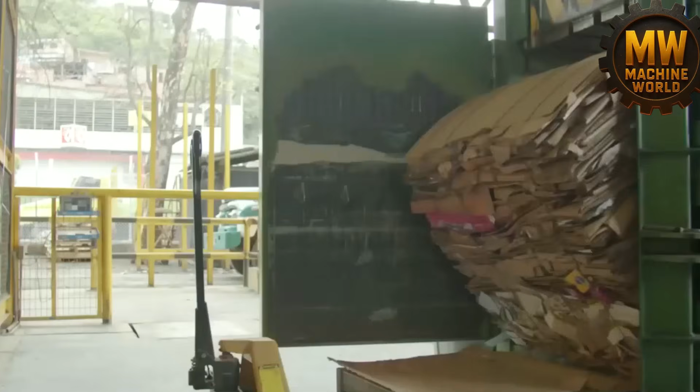Everything starts within the chaotic aftermath of daily global consumption. Behind the loading docks of supermarkets and within the vast distribution hubs of e-commerce giants, the sheer volume of discarded cardboard reaches colossal proportions. One can notice how powerful hydraulic presses engage with a mechanical hum, exerting immense pressure to compress loose piles of boxes into dense, uniform bales. Each of these structural cubes weighs exactly 1,000 kilograms. These units represent the primary stage of turning logistical chaos into industrial order.

But this is just the beginning. Thousands of these 1,000-kilogram bales are hoisted onto heavy-duty trucks to begin a synchronized pilgrimage towards specialized recycling centers. At first glance, the arrival at the facility appears to be simple unloading, but in reality, the environment vibrates with the constant roar of massive machinery.

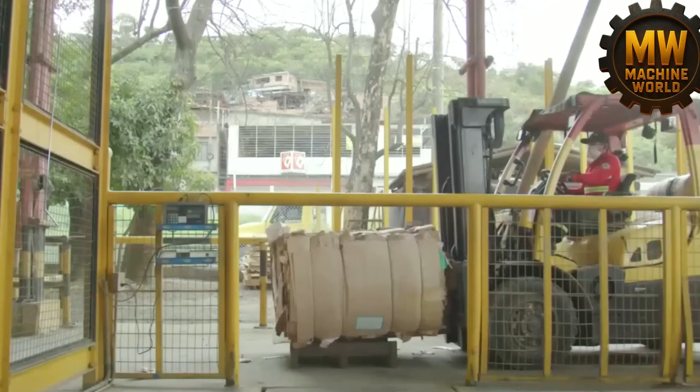Every single vehicle is weighed upon entry to track the incoming tonnage with absolute precision. The equipment gradually moves the material toward the first defensive line in the war against contamination. Transition to the next level. Inspectors and high-speed optical sensors operate in a continuous loop to identify and remove impurities that threaten the recycling process.

The camera glides along the belt where the machines hunt for fragments of plastic tape, forgotten metal staples, and nylon threads. Even a small trace of grease or excessive moisture is flagged immediately, because a single error in this screening phase can lead to the destruction of an entire production batch. The vigilance is absolute. Therefore, the material undergoes a secondary sorting process based on the specific grade of the fiber.

One can notice how the robust corrugated cardboard is separated from the thinner flat cardboard and boxes featuring heavy color printing. It gets more complex further on. Each unique category is diverted to a specific processing stream to ensure the final product meets the necessary structural standards. The material is ready to move to the next processing phase without haste.

1,000 kilograms is the exact weight of each individual bale, now standing in a clean and organized formation, ready for the next phase of its transformation. These dense blocks of recovered material must be completely deconstructed and returned to their primary fibrous essence before they can function as raw material once again. Why is such a violent mechanical process necessary for simple cardboard?

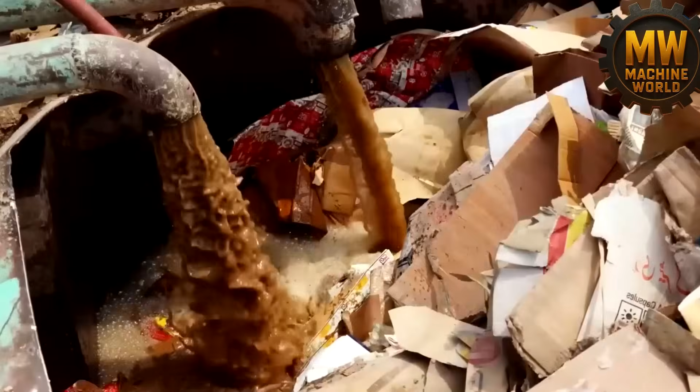At first glance, the material appears manageable, but in reality, only the immense hydraulic force of water applied at an industrial scale can break the chemical and physical bonds of the compressed sheets. The equipment gradually consumes the material within the hydropulper, which serves as the central hub of the entire facility. This giant vessel maintains a constant capacity of tens of thousands of liters of liquid, swirling in anticipation of its next intake. One by one, the 1-ton bales are dropped into this violent vortex with a heavy splash.

The water inside is not a stagnant pool, but a controlled force of nature, driven by the mechanical heart of the machine. Massive rotor blades at the base of the tank rotate at hundreds of revolutions per minute. The camera glides along the perimeter where one can notice the intense turbulence creating a physical environment where the multi-layered structure of the cardboard is simply disintegrated. Hardened adhesive that once fused the sheets together is ripped away by the sheer friction. It gets more complex further on.

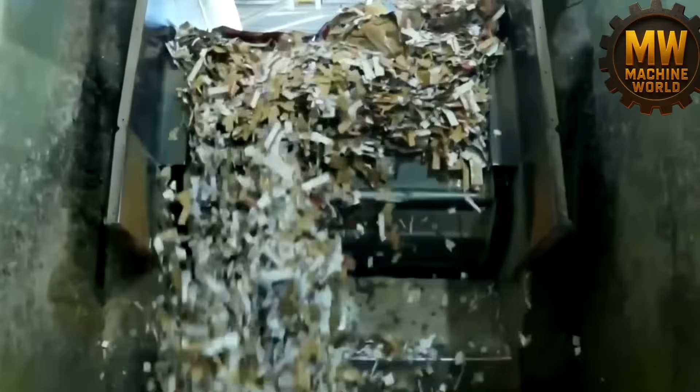Tinted inks and microscopic plastic coatings are stripped from the cellulose fibers like old skin as the mixture is intentionally diluted into a near-liquid state. In this suspension, only 1 to 2% of the volume consists of actual fiber, while the remaining 98 to 99% is water. Such extreme dilution provides each individual fiber with the necessary space to be surrounded by the liquid medium, allowing the water to attack the surface from every possible angle to clean and isolate it from its neighbors.

What was previously a rigid, solid block of cardboard has now transitioned into a thick brown slurry, forming a uniform mass of cellulose. This represents the first glimpse of a new life for the material, yet the pulp remains coarse, structurally weak, and filled with residual impurities. Everything only gets more complicated as the process gains momentum. Before this substance can be converted into high-strength paper, the fibers must be reconditioned and reinforced at a microscopic level. The fiber soup is currently chaotic and lacks the internal cohesion required for industrial applications. How does a liquid suspension gain the structural integrity of a solid sheet?

The answer lies in the refining machines, where the pulp is pumped through high-pressure lines to encounter rotating discs equipped with precision-engineered blades. This specific mechanical action does not result in the cutting of the fibers, but rather their delicate deflection. One can notice how the surface of each cellulose fiber is fibrillated, a process that opens up countless microscopic arms, or fibrils. These tiny extensions will later entwine with one another to form a chemical and physical bond of incredible strength during the drying stage.

But this is just the beginning. It is visible how the equipment handles the reality that every recycling cycle naturally shortens and weakens the individual fibers. To rejuvenate the mechanical properties of the mixture, the facility injects a calculated portion of virgin pulp extracted directly from raw wood. This infusion acts as a reinforcement, mixing veteran fibers with new long-chain cellulose to stabilize the integrity of the final product. The material is ready to move to the next processing phase without haste.

100% precision in the blend of recycled material and fresh wood fibers creates the necessary equilibrium between environmental sustainability and structural durability. Why is the combination of these specific components so critical for the final product? The external layers of the future containers require a surface that is both exceptionally smooth and rigid, and therefore they receive a significantly higher concentration of virgin fibers.

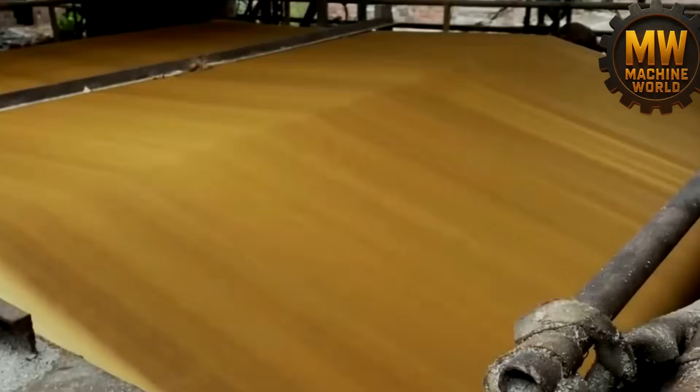The internal section, known as the corrugated medium, consists almost entirely of recycled material, but the technical formulation is not yet finalized. It seems simple at first glance, but the recipe requires exact chemical intervention. Additives are introduced into the aqueous suspension with millisecond timing. One can notice how starch is integrated into the flow to provide essential structural stiffness. Special bonding agents are added to regulate water absorption, while specialized resins ensure the material remains resistant to environmental moisture.

What began as a coarse pulp has now transitioned into a high-technology raw material. The process is only gaining momentum. 99% of the perfectly prepared suspension consists of water as it enters the paper machine, a massive engineering complex spanning several hundred meters in length. A thick brown torrent is discharged with mathematical uniformity across a wide wire mesh screen that moves at a vertiginous velocity. Everything only gets more complicated as the mechanical separation begins.

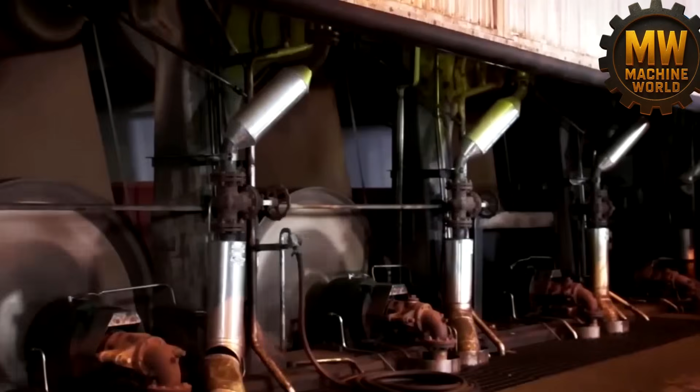Gravity and high-pressure vacuum systems pull the liquid downward through thousands of microscopic apertures in the mesh screen. One can notice the water departing from the fibers, leaving behind a thin, concentrated layer of cellulose on the surface. Now liberated from the liquid that kept them separate, the fibers begin to settle and interlock, forming a delicate and complex structural web. It looks outwardly simple, but the formation of the web determines the strength of the final sheet.

Giant press rollers positioned beneath the moving screen gently squeeze additional water from the mass, compacting the new formation into a cohesive unit. The liquid visibly transforms into a solid state as the camera glides along the production line. Where a shapeless flow previously existed, a continuous sheet of paper now emerges, appearing pale and damp.

Laser sensors monitor every millimeter of the moving surface with absolute accuracy. They measure thickness, uniformity, and moisture content to ensure that no defects interrupt this fragile stage of development. A new sheet of paper has been synthesized, but it remains heavily saturated. More than half of its total weight is currently comprised of water, leaving the material vulnerable and weak.

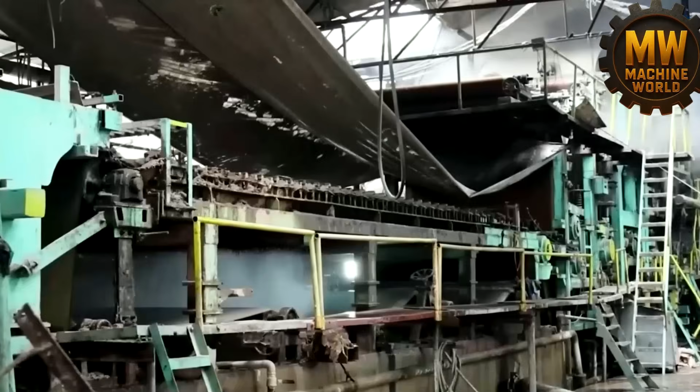To achieve its legendary structural strength, the sheet must now face a significant technical challenge involving extreme heat and mechanical force. The damp sheet is guided precisely into the press section. The equipment gradually increases the intensity of the physical processing. Pairs of massive steel rollers, each weighing more than a standard automobile, compress the sheet with a force equivalent to hundreds of tons. The water is literally crushed out of the fiber matrix, forcing the cellulose strands to unite in a more intimate and powerful molecular bond.

One can notice how the thickness of the sheet stabilizes and the surface becomes smooth, but the raw power of mechanical pressure alone is insufficient for the final result. The material, now significantly stronger, moves deeper into the machinery as the transformation continues toward its next physical state. 100 meters is the minimum length of the thermal tunnel, where the damp material enters the drying section. Why is such an immense distance required for a process that seems like simple heating?

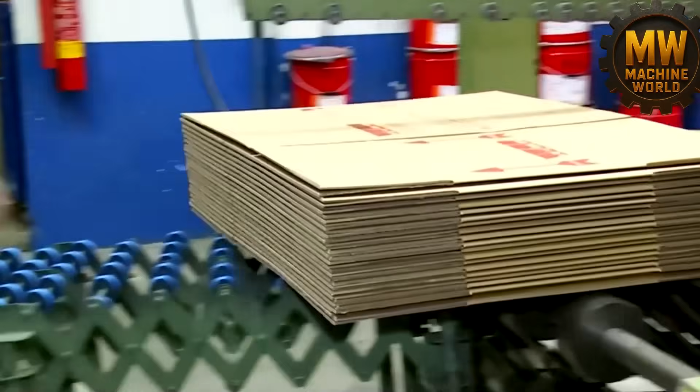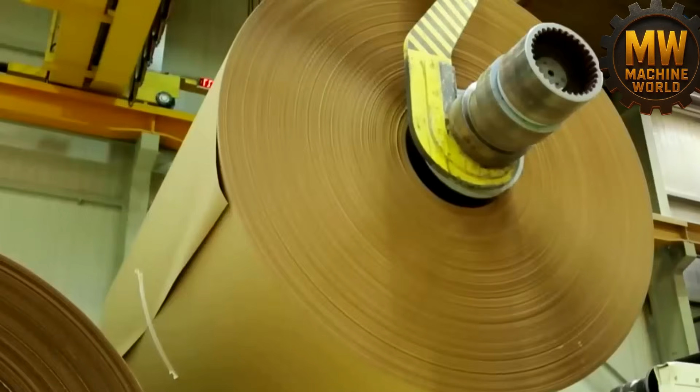5 to 7 times is the maximum number of cycles a single cellulose fiber can endure before its structural integrity fails. At first glance, the recycling loop for corrugated cardboard seems infinite, but in reality, each mechanical breakdown shortens the fibers until they are too weak to bond into a robust sheet. Why is this degradation so critical for industrial production?

The answer lies in the physics of the material, as short fibers cannot create the interlocking web necessary for heavy-duty packaging. Therefore, these exhausted materials are redirected into the production of less demanding goods, such as egg cartons or paper napkins, where structural rigidity is not the primary requirement.

Industrial rollers apply consistent pressure to ensure a perfect bond between the layers of what is now called corrugated cardboard. The process is only gaining momentum. This specific engineering creates a material that is simultaneously lightweight, inexpensive, and remarkably durable.

One can notice how massive industrial blades slice, crease, and fold these sheets with millisecond precision, transforming them into the vast array of box shapes used globally. Everything only gets more complicated as the material moves from flat sheets to complex three-dimensional fortresses of paper.

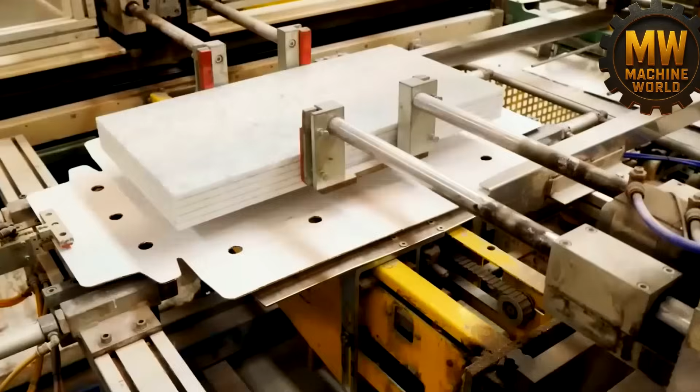10% of recycled material added to glass production reduces energy consumption by 3%. This fact highlights that recycling serves as a powerful force across multiple industries beyond just paper.

It is visible how the cycle eventually closes when a discarded box from a warehouse corner is reborn as thousands of new units. Each container seen on a delivery truck or at a doorstep serves as a silent witness to this continuous transformation. The process does not end at this stage.

17 trees remain standing for every single ton of cardboard that is successfully recycled. Furthermore, this conservation effort saves 26,500 liters of water and prevents 1 ton of carbon dioxide from entering the atmosphere.

It only looks obvious that a box is simple waste, but in reality, it is the starting point for a subsequent life cycle. The material reaches a standard ready for the further stage of its existence.

Marble represents a symbol of wealth and permanence found in palaces, museums, and high-end kitchens worldwide. One can notice the mirror-like shine on a perfectly smooth slab of this stone. But how is such a finish achieved from raw geological formations?

The journey toward that polished surface does not begin with the delicate touch of an artist. It starts with a violent mechanical battle to extract a single block from the earth. The transformation moves to the next phase of processing as the stone is separated from the mountain.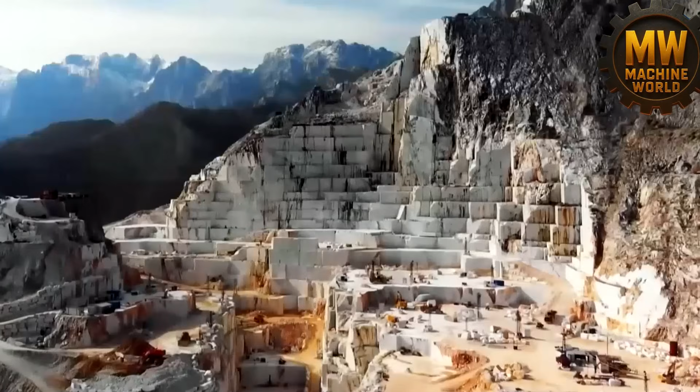70 feet is the exact height of the useless earth that engineers must remove before reaching the target material. Why must such a massive volume of rock and soil be destroyed? At first glance, it seems like unnecessary destruction. But in reality, this layer of overburden acts as a fortress protecting the valuable marble within. Without its complete removal, access to the high-quality stone remains impossible, rendering the entire operation stalled.

One can notice how drilling teams begin the process by creating a precise grid of deep boreholes. This layer of 7 stories, equivalent to 21 meters of clay, silt, and debris, is systematically pulverized using carefully measured explosive charges. It gets more complex further on. The siren of warning cuts through the air, followed by a momentary heavy silence.

Tens of tons of explosives detonate with a calculated delay, making the ground tremble as a massive cloud of white dust rises to obscure the sky. This is not chaotic demolition, but a surgical procedure performed with dynamite to strip away the mountain's outer skin.

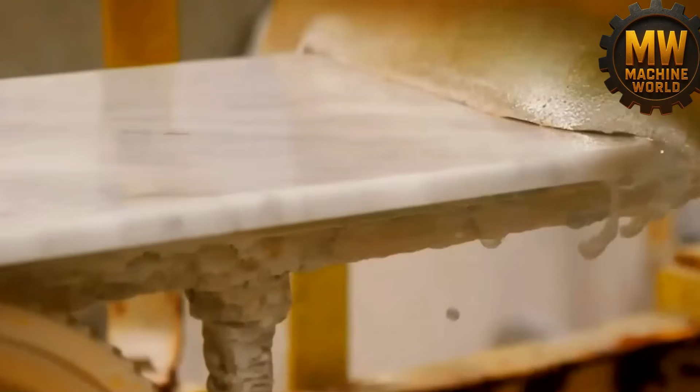Thousands of tons of waste rock are torn from the slopes and tumble down the quarry walls with a heavy, rhythmic thud. Everything only gets more complicated once the dust slowly settles. The prize is a 40-ton colossus of stone that must eventually be transformed into a slab so perfect that a microscopic defect would make it worthless. The process is only gaining momentum.

It seems simple to use explosives for the entire task, but in reality, the strategy must change the moment the marble vein is exposed. If the same brute force used to clear the overburden were applied to the marble, the internal structure of the stone would shatter. Therefore, the engineers transition to a method of absolute precision.

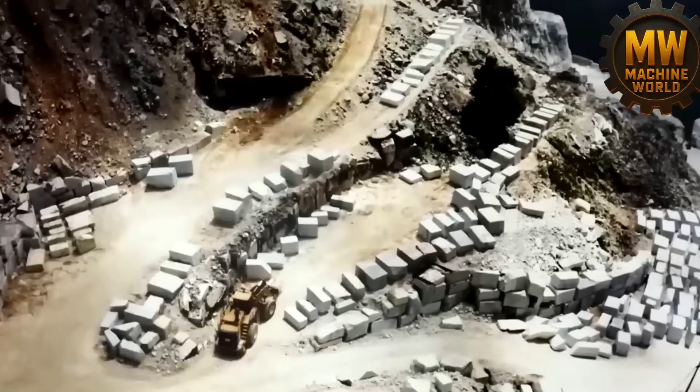The camera glides along a thick steel cable embedded with the hardest material on the planet, industrial diamonds. This wire is threaded through precisely drilled intersecting holes to form a continuous loop. It only looks obvious that a simple wire could cut stone, but this is a high-tech diamond saw. The machine activates with a sharp, constant hum that resonates through the quarry.

One can notice the diamond wire beginning to saw through the solid rock at a steady pace. Simultaneously, high-pressure pumps deliver a continuous stream of water into the deepening cut. The water serves to cool the diamonds and flush out the fine stone slurry as the wire makes its way through the mountain. The transition to the next level of extraction is now underway.

2 distinct missions are performed simultaneously by the continuous stream of water directed at the diamond wire. Why is this constant lubrication vital during the extraction phase?

At first glance, the setup looks like a simple cooling mechanism, but in reality, the fluid prevents the steel cable from melting under extreme friction while washing away the marble slurry, the fine white powder that forms as the stone is ground. The equipment gradually penetrates the rock at an agonizingly slow pace, advancing centimeter by centimeter through the solid mass. One can notice the mechanical tension rising as the groove becomes deeper.

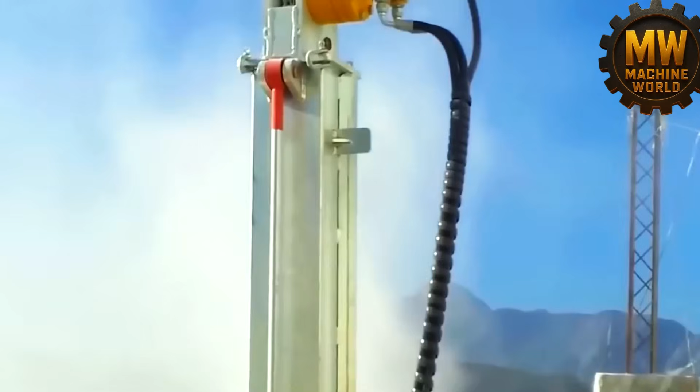Workers insert hydraulic jacks into the narrow crevices with measured movements. Using a silent force equivalent to hundreds of tons, the pistons begin to push against the ancient stone. A deep groan echoes through the quarry, which is the physical sound of the mountain finally surrendering to the pressure. It gets more complex further on.

40 tons is the weight of the massive block that finally separates from the mountain face, standing as tall as a 3-story building. The block is free, but it immediately transforms into a 40-ton problem for the logistics team. This mass is equivalent to the weight of 30 average cars or 6 full-grown elephants concentrated into a single geometric shape. It is impossible to simply drag such a colossus across the uneven ground because the risk of fracturing the expensive material is too high.

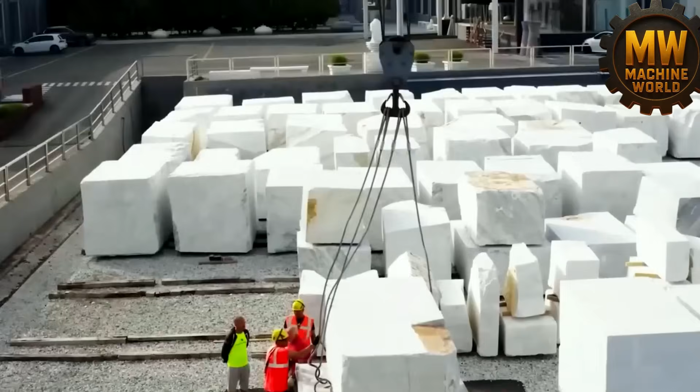Therefore, the slab must first be moved with extreme caution to a waiting yard, which serves as a flat and secure staging zone located within the quarry perimeter. True giants of the industrial world enter the scene at this stage. Heavy crawler cranes, machines specifically engineered to lift impossible loads, begin to position themselves around the white stone. Massive steel chains, featuring links the size of a human head, are secured around the block with heavy clanking sounds.

One can notice the crane motor laboring under the initial strain, producing a deep, guttural roar as the hydraulics engage. The tension in the steel links becomes absolute as they stretch to their limit. Precision of a master is required from the crane operator during this delicate maneuver. The stone colossus is hoisted from the ground with millimetric accuracy to avoid any sudden shifts in the center of gravity.

The block is then carefully lowered onto a specialized transport vehicle that barely resembles a standard truck. It is a low-profile platform trailer equipped with multiple axles and dozens of heavy-duty tires. Why are so many axles and wheels required for a single load? To the eye, the trailer design seems redundant, but 40 tons concentrated on just a few contact points would instantly pulverize any road surface. By distributing the weight across dozens of wheels, the pressure becomes controllable and the infrastructure remains intact. Safety checks are performed 2 or 3 times by the crew before the journey commences.

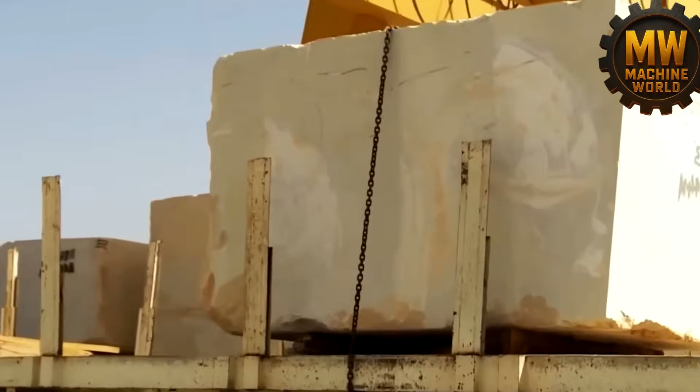The truck moves at a snail's pace, beginning the slowest journey imaginable as it climbs the steep, winding mountain roads. Each curve represents a complex logistical challenge, where the trailer must be positioned perfectly to avoid the edge. Every descent tests the braking systems to their absolute limit as they fight against the momentum of the 40-ton mass. This slow-moving convoy is transporting the raw material from its original geological home toward the factory. The stream of production is only gaining momentum as the stone leaves the mountain. From here, the transformation moves to the next phase of processing.

40 tons is the exact weight of the monolithic block as it arrives at the industrial facility. Why does the air inside the plant lack the sharp scent of explosives and quarry dust? The atmosphere here shifts toward the heavy smell of wet stone and cold metal. This creates a distinct sensory contrast compared to the extraction site.

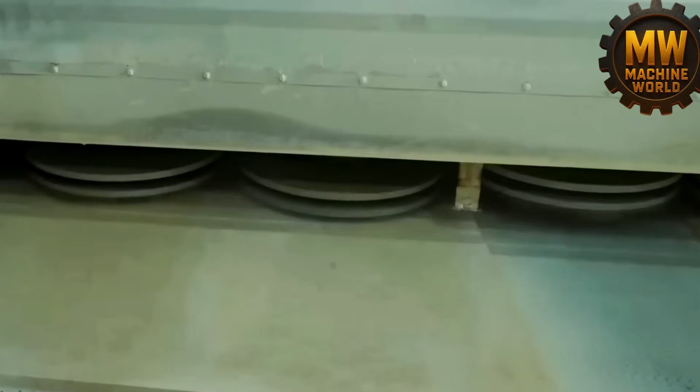Hydraulic clamps of immense proportions descend upon the block to fix it onto the cutting platform with massive force. The equipment gradually tightens until the stone is immovable. One can notice how the block remains perfectly still, as a deviation of even a single millimeter during the cutting process would result in crooked slabs. At first glance, the setup seems simple, but in reality, any movement ruins the entire batch.

The machine waiting to process the stone is known as the gang saw or frame saw. It consists of an enormous structural housing designed to support the weight of the block while holding a giant frame equipped with dozens of parallel blades. Arranged like the teeth of a massive comb, these blades begin their work with a rhythmic and deafening roar. The frame moves back and forth, establishing a brutal and hypnotic pace. But this is just the beginning.

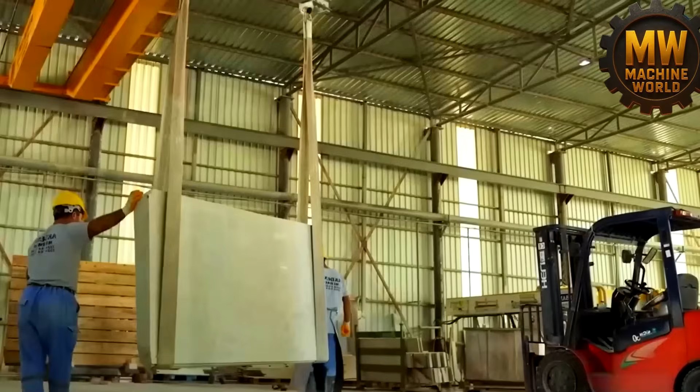Abrasive-coated blades begin to descend millimeter by millimeter into the 2-meter-thick stone. Simultaneously, a continuous stream of water and abrasive sand pours over the cutting area. This abrasive slurry acts as a lubricant and cutting agent, helping the metal blades bite deep into the rock. It is visible how the gray mud splashes against the machine walls as the incredible noise fills the hall. The process is only gaining momentum. For a single block of marble, the machine may require between 12 and 20 hours of continuous operation.

12 to 20 hours represents an entire working day, or even more, dedicated to sawing a single piece of stone. Patience serves as the most critical tool in this factory. It gets more complex further on. Finally, after nearly a full day of mechanical labor, the blades pass completely through the bottom of the block.

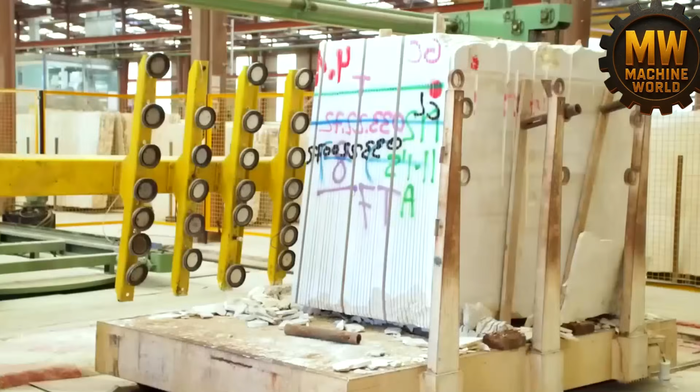What was once a solid cube is now transformed into a giant deck of cards. A set of stone slabs remains, with each individual piece weighing hundreds of kilograms. One can notice how the slabs appear lifeless at this stage. They are dull to the eye and rough to the touch, possessing a pale color masked by the gray mud left behind by the cutting process. Everything only gets more complicated as the famous beauty of the marble remains hidden beneath the surface.

Now the physical transformation begins. Automated robotic arms enter the workspace to take over the heavy labor. No human hands are used here because the slabs are both too heavy and too delicate for manual movement. Giant vacuum suction cups descend with the hiss of pneumatics, gripping the stone before lifting it into the air.

The robot maneuvers the slab onto the polishing line, which functions as a long tunnel of transformation. The slab slides slowly under the first station, where a set of rotating heads waits to begin the refinement. Transition to the next level. These rotating heads represent the first step in revealing the stone's inner texture. 8 automated grinding heads are equipped with specialized abrasive discs to begin the transformation of the stone surface.

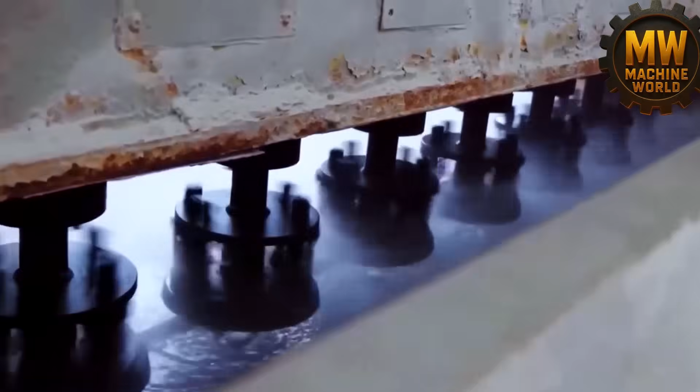Why is the sequence of these grinding stations so strictly regulated? It would seem that a single pass could achieve the desired smoothness. But without a gradual transition between grit sizes, the deep structural gouges from the initial processing would remain permanently embedded in the material. The process commences with exceptionally coarse grains, functioning like an industrial-strength sandpaper designed for heavy material removal.

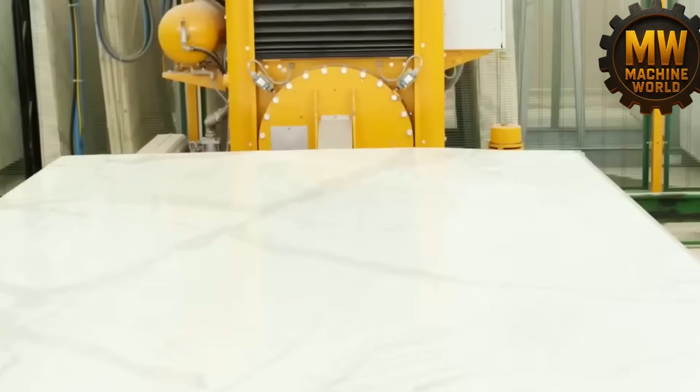One can notice how the slab advances steadily as a harsh, violent rasping sound fills the facility, echoing the friction of stone being forcefully abraded. The first layer of resistance is broken here, but this is just the beginning. The second station features discs with significantly finer grains to refine the surface. The acoustic profile of the workshop shifts immediately as the grinding sound becomes noticeably higher in pitch. At the third station, even finer abrasives are applied to the slab.

It is visible how the stone passes through a minimum of 7 or 8 distinct sanding stages in a continuous line. Each subsequent phase is designed to remove the microscopic scratches left by the previous disc, making the surface progressively smoother to the physical touch. Throughout this entire sequence, the equipment operates under the constant pressure of falling liquid. Tons of water pour over the machinery to cool the rapidly spinning discs and wash away the thick marble slurry generated by the abrasion. This prevents the stone from overheating and ensures the abrasive grains remain unclogged.

Everything only gets more complicated as the slab reaches the final station. This specific unit does not utilize abrasive grains at all. Instead, it employs a specialized chemical polishing compound applied under intense pressure. The heads rotate at high speeds, and the dull gray stone suddenly undergoes a physical transition into a reflective mirror.

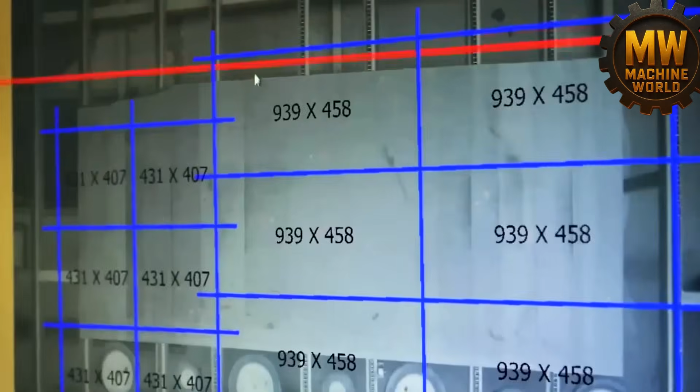Where the surface was once matte and lifeless, a deep, brilliant finish now appears that captures and redirects the ambient light. Colors explode across the surface as the hidden veins, locked away for millions of years, are finally revealed to the eye. At first glance, the polished slab looks absolutely flawless, but in the luxury market, appearance alone carries no industrial value. The most dangerous defects are those that remain hidden from human perception.

One can notice the slab gliding silently into a specialized dark chamber for the next level of verification. It is here that a laser inspection system begins its work. Intense beams of red light sweep across the entire surface of the stone at high frequencies. The laser performs a task that the human eye is physically incapable of completing. It measures the absolute flatness of the material and searches for internal microcracks that could compromise structural integrity.

The equipment identifies every minute anomaly, from a tiny trapped air bubble to an invisible stress line caused by the original quarry explosion. It only looks obvious that the stone is solid, but in reality, the computer must analyze every millimeter of the laser image for discrepancies. If the system detects the slightest imperfection, the slab is immediately marked with a red indicator. Rejection occurs instantly. Even after the immense labor of polishing and grinding, the compromised stone is discarded from the premium line. The process is only gaining momentum for the slabs that pass this rigorous digital screening. Only the perfect specimens are allowed to proceed further through the manufacturing chain.